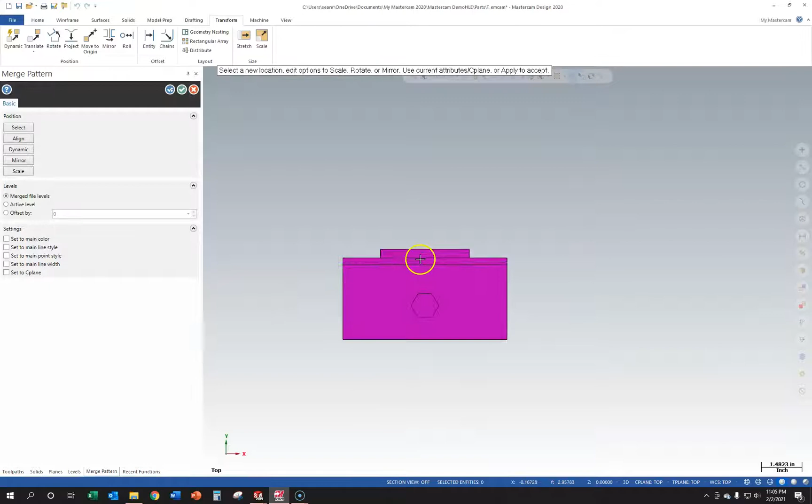So we'll click open. I'm just going to confirm that all the parts are here. I'm not going to make my rotary moves yet. I'm just going to click OK on this. Everything looks pretty good. When we go into levels, I'm going to cycle through my visibilities to see which parts are which and rename everything. So I'll start with 6. Appears to be a parallel.

1.563 parallel. Probably means number 5 is the same. Yeah. 1.563 parallel. Number 4 is our stock block. Again, I'm putting op 10 in front of these so that if we had additional operations later on, we'd have different solids, we'd want to make sure we have that in front so we know the difference between the two.

Number 3 appears to be the part itself. Yeah, so I'm just going to call that op 10 solid part for now. Number 2 is the movable jaw. Which means our number 1 must be our fixed base. Say vice base, something like that. Perfect.

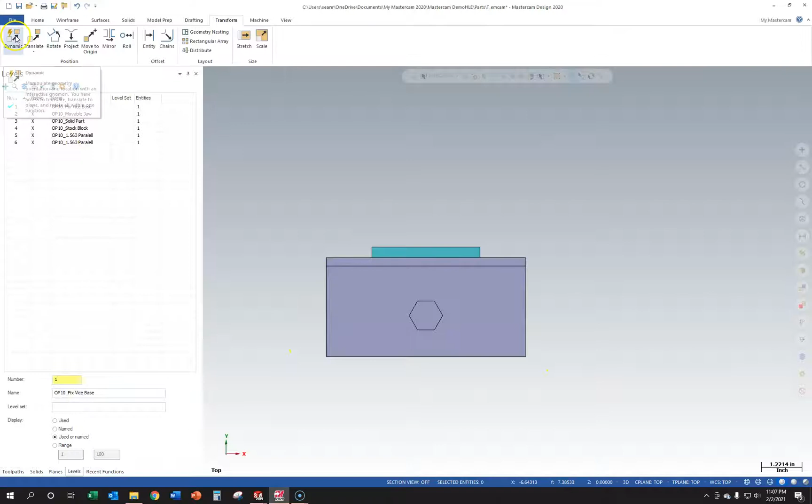Okay, with all of those changed, now we can look at positioning the assembly in the proper orientation. So if I right click and look at top, you'll see that per usual the assembly is out of whack by 90 degrees. So we're seeing the front of the assembly right here. I'm going to go to dynamic. I'm going to rotate in space so I can kind of see the isometric view, and I'm going to click anywhere for the gnomon to start. I'm sorry, we need to select all the pieces first. So I'm going to do a pick box and the selection, and then here's my gnomon.

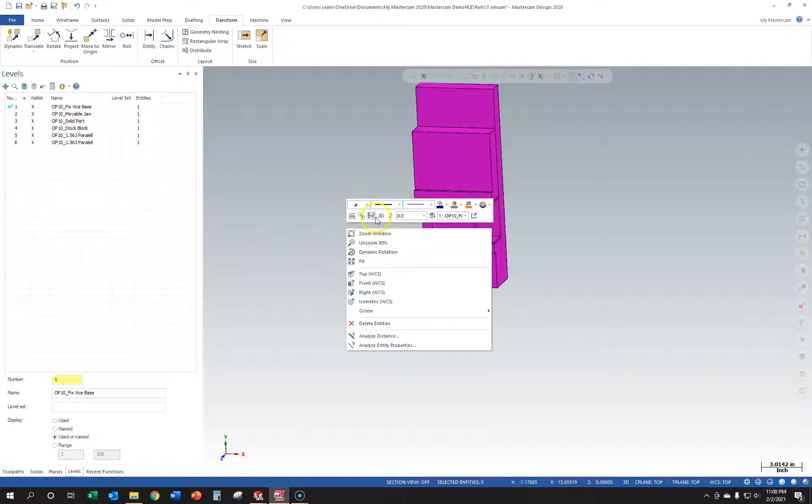So again, we want to rotate 90 degrees like this in this direction. That's between the Y and the Z axis. I'll left click on that segment, and it looks like we want a positive 90 degree move. So we'll type in 90, hit enter, check the preview, looks good. I'll hit enter again, and then OK. Again, you'll see that we need to clear colors to get the purple selection color to be removed. And now when I right click and go to top, you'll see that we now are looking at the top view correctly.

Now, in order to get the WCS point where we want it, we're going to turn the stock off for a second and take a look at the part. So we do not have a sharp corner to use currently on this part in order to get the bottom left hand corner. And looking at the part, I'm not sure if what we want to do is use the bottom left hand corner. I'm going to open the blueprint up again and kind of show you what we can look at as far as datums here.

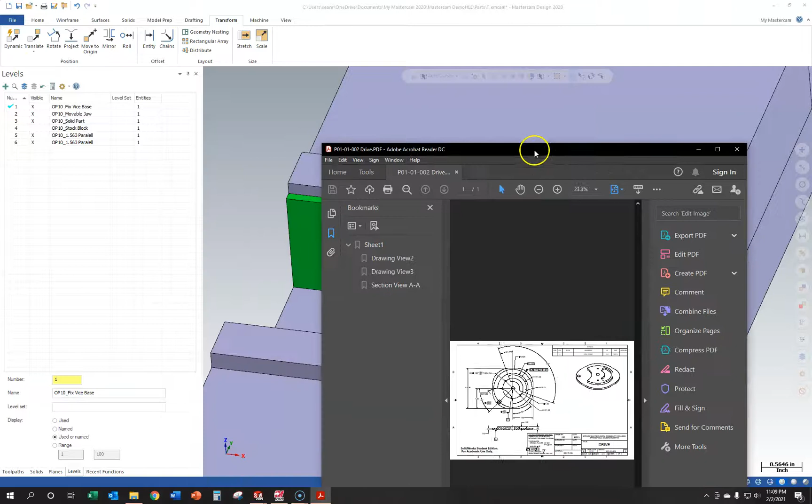So you'll notice that most of the dimensions come off of the center of the part. That is one of the most important positions, and that's because all of these are based off of the pin in the middle. So in order to make sure all of these are correctly machined, when we read the program, we want to base everything off the middle.

So what I think we'll do is we'll just use the top of the part here, this hole, as our 0, 0 point, and we'll go from there. That'll be the easiest thing for us to do. So what we'd have to do on the machine is we would actually be touching off on the edges and then offsetting a certain amount, this 1.5 inches specifically, in order to get to this position and zero this out.

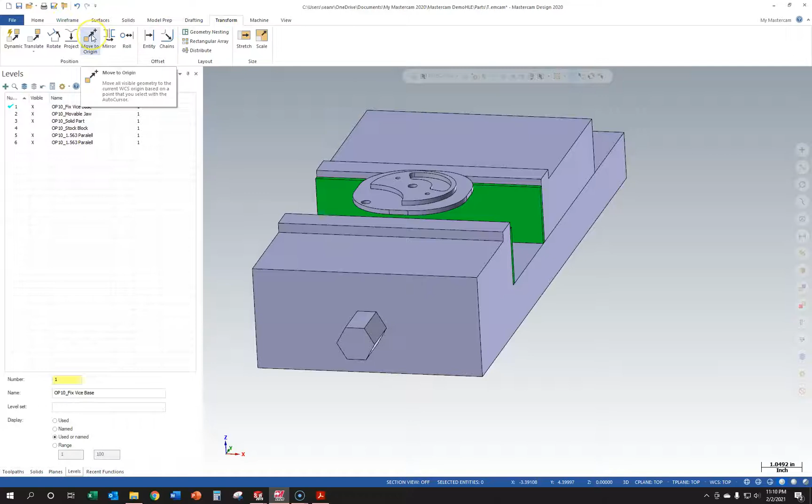We're going to move this to the origin. That's one of the easiest ways to do it. It's really quick, and then we'll actually be ready to go for the most part. We'll have to make a new plane afterwards. So if we go up into Transform, we have a button here called Move to Origin. I'm going to turn on the F9 key just so I can see where the origin is, just to confirm that it actually goes where we want it. And I'm going to click on Move to Origin.

You'll see that it selects everything on the screen, and actually I almost made a mistake here because I turned the stock off. We want to make sure the stock is turned on before we push that button. So we're going to confirm that all of our levels are on. I'm going to click Move to Origin. I'm going to select the point to translate from, and that's basically the center point of the part. Now that I have this all selected, I can turn the stock back off, and I can click on the top of the part in the center of the circle here and make sure we get the center point.

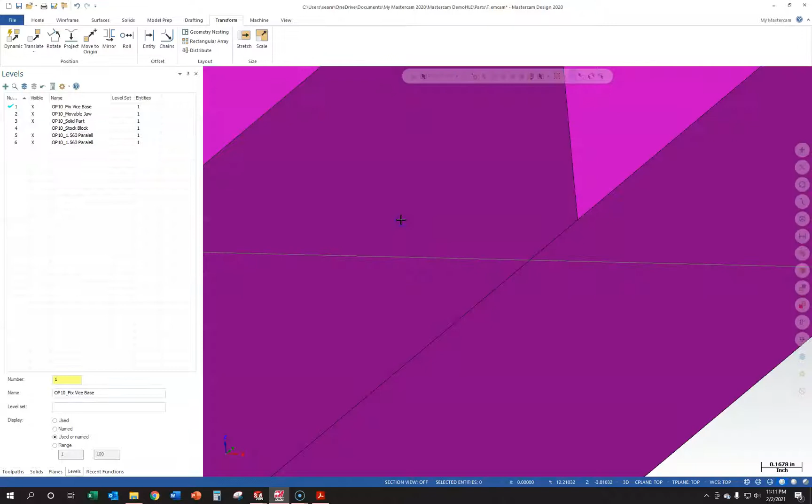And then we can confirm that that is indeed where we are, and when I turn the stock block on, it also came to that position as well. So that is exactly good. I'm going to hit F9 and turn that off. We're going to right click and then clear colors.

So now that we have that, I'm going to go ahead and just make a copy of the top plane. The position is going to be exactly right, so all we need to do is literally duplicate this and rename it. So we'll duplicate it, rename, we'll call this op 10 G54, and then we're going to make that our active plane, so that when we start using it, it'll be on G54 here. And now we are able to go ahead and just create our stock real quick.

In order to do that, we need to bring in a machine group. So since I'm working at home and I don't have the stick profiles loaded, I'm just going to use the default. I'm going to check the list anyways. Yeah, so we're in here. If we had the stick posts and everything loaded, we'd have more stuff here that we could add. But for now, I'm just going to click on default. Going to go to properties, stock setup.

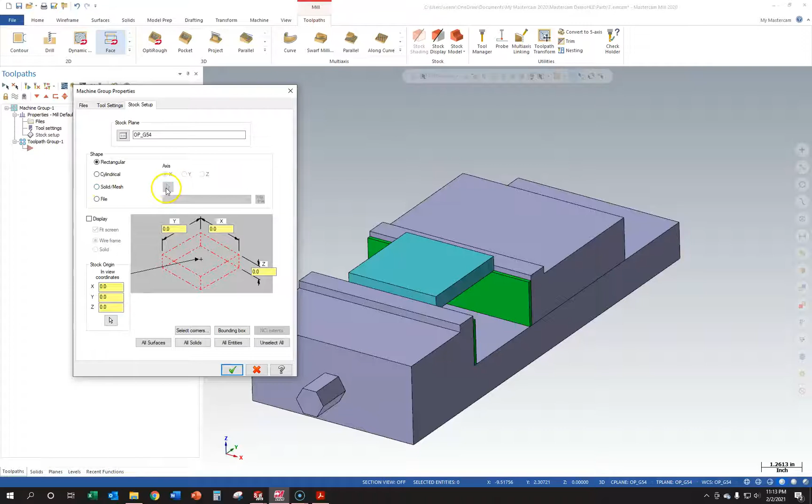Going to do something a little bit different this time. So instead of doing the solid mesh selection, I'm going to use a bounding box. And this allows us to click on the solid. It's going to bring in our size settings and everything like that. Just going to click on that, and then I'm going to click end selection. You'll see that it made a stock profile around the outside of it.

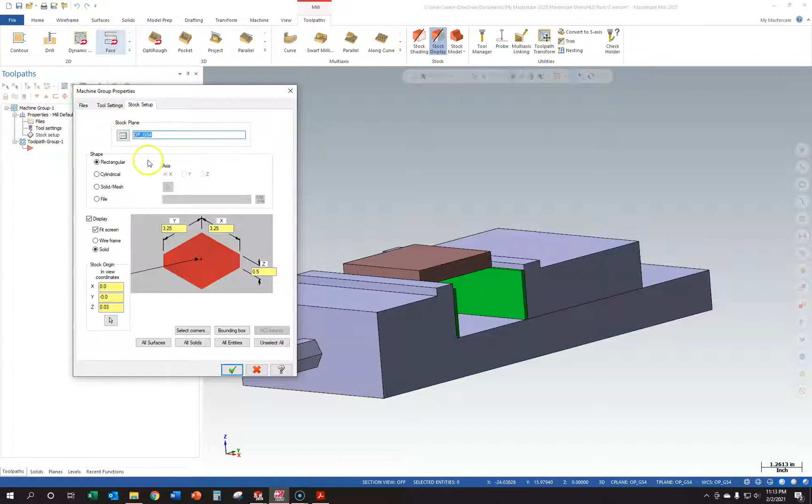Do we want it to be a solid stock? Yeah, it turns into a solid stock after that. The only thing you need to change here is if you want to do this solid or wireframe. I usually like to work with the solid. That works out for me. Make sure my op 10 G54 stock plane is active, and it actually looks like I misnamed this. So I'm going to go back in there and change that real quick. Yeah, I forgot to actually put the op 10 part in there. Op 10 underscore G54, that's what we want.

Okay, perfect. So now I'm going to go ahead and just get rid of the solid body for now, just so I can see what it all looks like. And I'm happy with that. I just want to review the front here and see if we have stock on top, which we do. Plenty of clearance in the bottom. I'm going to right click isometric. So I'm happy with this.

Our levels are all set up. Stock is all set up, and our WCS is in the correct orientation in relation to the part and to what the important dimensions are. So yeah, not too bad. At this point, we are ready to start machining this part. I'm going to go ahead and save this before we get going on that.

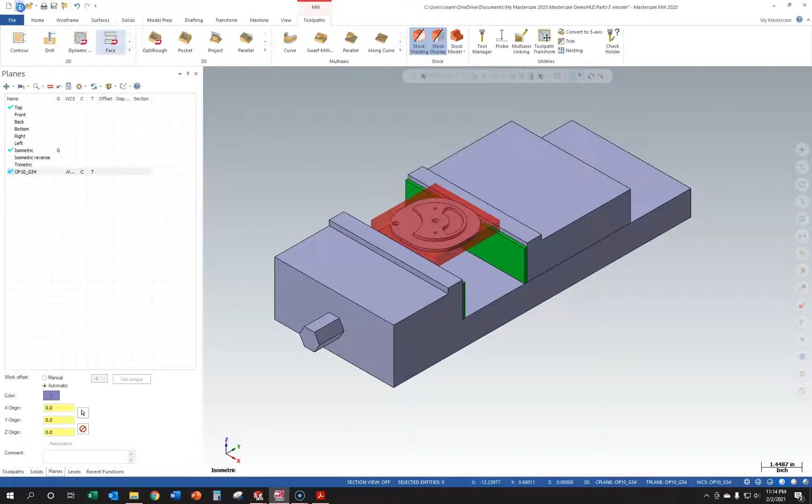And again, I'm going to go find my working directory, and we'll drop this in here. So for me, it's inside my week 2 folder, and I will call this op 10. Actually, we'll go Geneva mechanism drive op 10. Save. Okay.

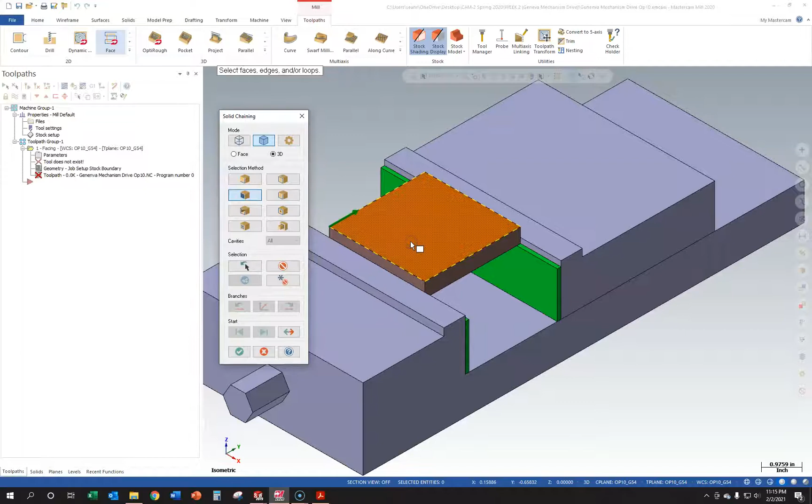So the first thing we're going to want to do is face the part. We're going to turn the solid block back on because we're going to use that as our chaining entity. We'll turn it back off again afterwards. So we'll go to face. I'm going to make sure face is selected. I can uncheck loop too if I want to. Just click on face. Click on the top of the part. Click OK. And now we're inside of our 2D toolpath facing box here.

One chain selected. For a tool, I'm going to go ahead and find my 2.5-inch face mill. You may have to use the filter to find it, depending on what library you're looking at. And you don't need to use 2.5. If you want to use 2 or 3, you can use any combination of that. Just use a realistic tool. Don't use one of these obnoxious ones down the bottom here.

The comment for this face mill is going to be the usual. So face off, I think we said 30 thousandths of stock to establish Z 0.0. Something like that sounds good. Feed rates and all that stuff we're going to leave the same at Mastercam's default. Cut parameters we'll leave the same too. The default overlaps and stuff are fine.

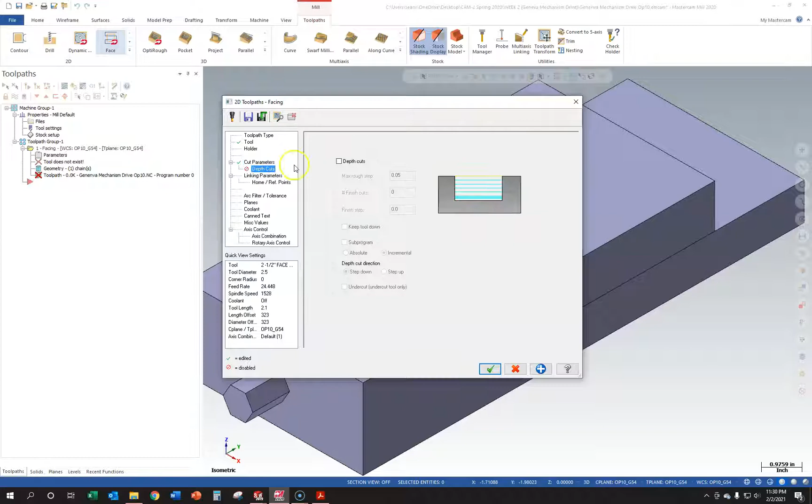We don't want to leave any stock on the floor, so I'm going to go ahead and change that to 0. We can mess with some of this stuff later on if we want to try and make it more efficient, but for now we're good. No depth cuts. We'll cut it all in one pass. Linking parameters, we're used to these by now, so clearance of 2, retract absolute 1/4, feed plane absolute 1/4 inch.

Top of stock should be 30 thousandths. That makes sense because that's how much extra we have on the top. And then our depth should be absolute 0. I like to double check this by clicking. I will have to turn off the solid stock to do that. So if I click on the top of the part anywhere on these snap points, that should be 0. So that confirms that we're on the right plane.

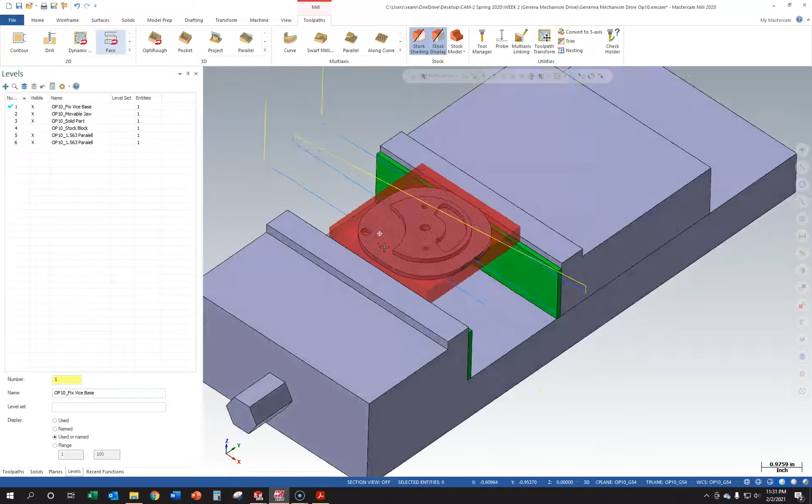Everything looks good. And I'll go ahead and turn the coolant on. We'll flood it. Apply and OK. Looks good to me. We'll run a back plot on that. Don't really have any comments. It all looks good. Although I do have it one way. There's no real reason to do that. We could change it to dynamic or something along those lines. Nah, that's not what we're supposed to do. Just double check something here.

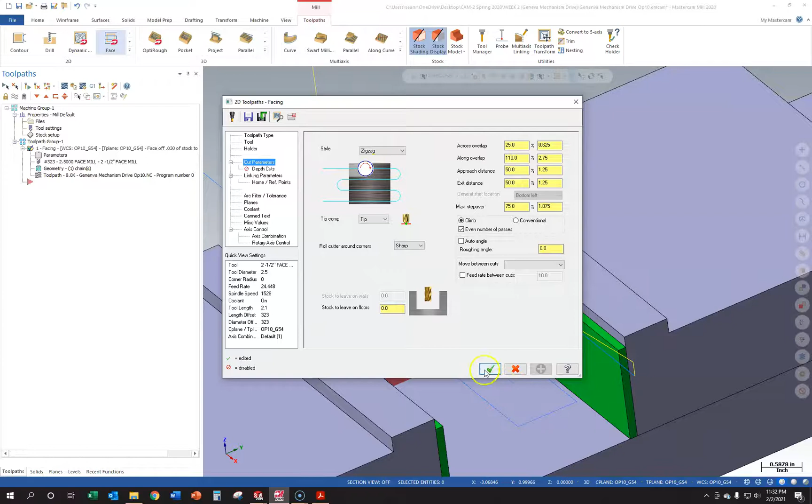Zigzag. So if you do one way, you'll see that there's some lifting. It basically only cuts one direction and it lifts up and goes back. Zigzag, you stay on the part the whole time and you're not lifting up off the part. So this tends to be a little bit faster. So I'll put that back on zigzag. There we go.

The next step that I want to perform is going to be the machining of this area here, which is going to involve using a dynamic milling pass, and we're going to use the stock profile as the outside machining boundary, and then we'll use this perimeter on the inside here as the avoidance, so it machines between the end of the stock block and this here. To do that, we're going to use dynamic. And again, we need a machining region to be our stock block. That's what we want to be contained.

So I'm going to turn on the solid block again. I'm going to go to machining regions, and I'm going to use the loop selection method for solids, and that will allow me to select the outside of the stock block. It correctly identified the face that I want the first time, so we'll click OK. Direction here in this case doesn't matter. We want to be able to start from the outside, right? We want to be able to machine from outside where we started. If we did this, we wouldn't get these corners machined properly. So we want to stay from outside.

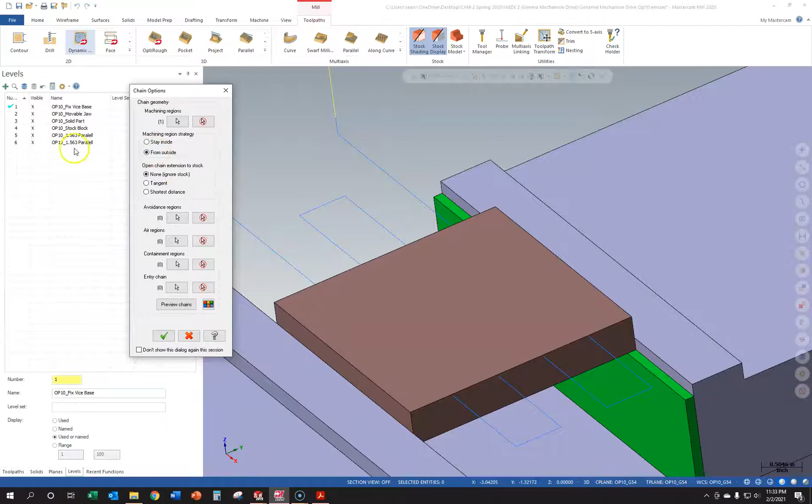I'm going to turn the stock block off again so I can see the part. And now I'm going to turn our avoidance region on, and I'm going to select the same thing. We'll do a loop, get rid of the face, we'll do a loop again, and I'm going to select the bottom part of this geometry. The top would have worked too. I don't think it matters one way or the other. So basically we're telling it that we don't want to machine in this area, and we're going to machine up to the machining region section there.

So those are our two chains. We're going to click OK, and we'll stick with dynamic mill. Again, our chain geometry has been selected. For our tool, we have no inside radii or anything to worry about. Nothing's going to constrain the size of the tool that we use.

So I'm going to go ahead and find a 1/2 inch or 3/4 end mill and go ahead and use that. I'm going to go use my filter. I'm going to turn on just the flat end mill filter, and we'll look. I'll use a 3/4 flat because that will rip off a lot of material nicely. So we're going to say, let's see, rough machine.

We'll call that area the boss. We're going to leave stock on the walls and the floors for finish. So let's just say, let's leave 10 thousandths. Leave 10 on the wall and 10 on the floor for finish. And we'll do those two passes separately coming forward next time here.

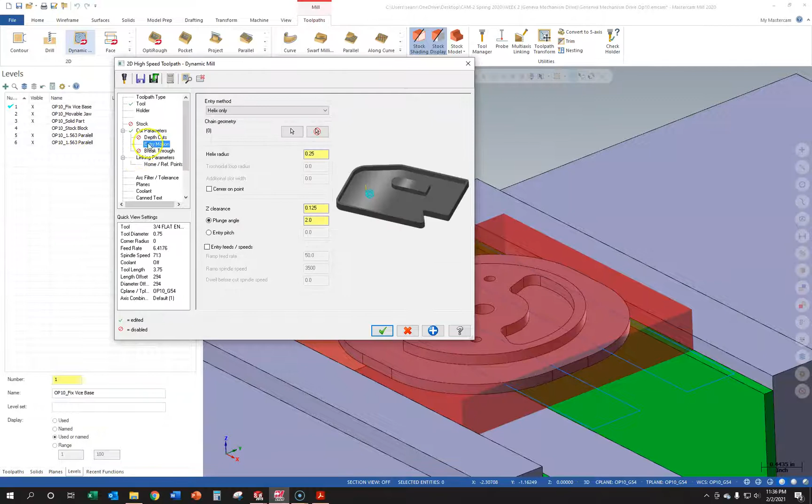Entry motion we'll leave alone. We'll look and see what it looks like on the part when we do this. There's no breakthrough. Linking parameters, same numbers we always use. Clearance of 2, absolute. Feed plane should be absolute 25 for now. Our top of stock is no longer 30 because we've removed that with the facing operation. So top of stock is now 0, and our depth should be absolute.

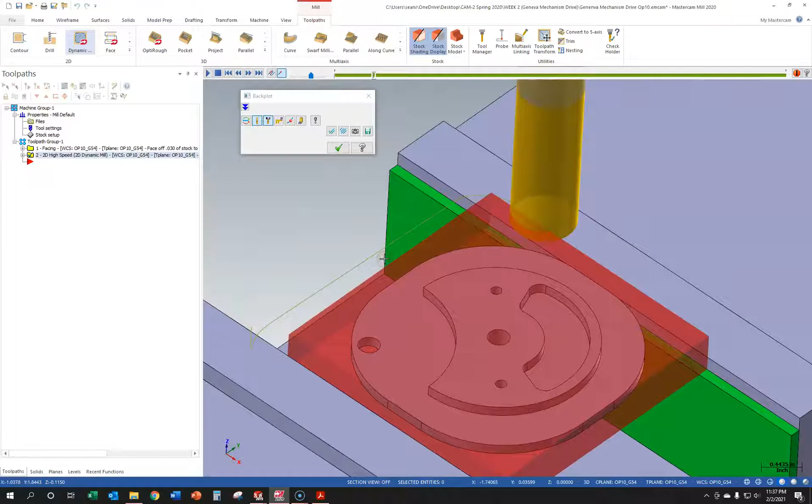And to get that value, I'm going to click on depth and then select the bottom of that boss. So negative 0.125. Again, I'm going to go to coolant and turn the flood on, and then I'm going to click OK and see what we get for a machining profile. Looks okay from here. Let's go ahead and check this tool path here. It's a large end mill, so it's going to rip most of this material off pretty quickly.

I'm going to check my front view and make sure that it makes sense that we're 10 thousandths off the bottom of that. Looks good. And then we should also be 10 thousandths away from the wall too when we get down to that last pass. I'm fairly confident that we're good here. Perfect. Okay, so now we need to do the finish passes on the walls and floors here.

We could do that now, or we could save ourselves a tool. If we're going to use the 3/4 end mill for the outside of the part as well, we may want to do that first and then switch to whatever finishing end mill we're going to use, and then go from there using that tool without having to go back and do a tool change. So let's do the roughing on the outside first, and then we'll come back and do the finish passes for these two features. We're going to use the same dynamic mill.

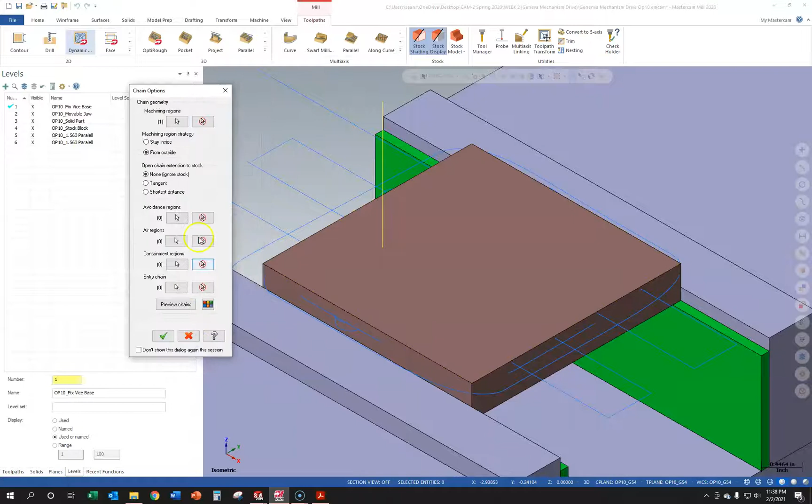This time our machining region is going to be the stock block again, because we're going to be machining out to here, but just a little bit lower this time. So our machining region will be the stock block. To turn that solid on again, we'll use loop for a selection method. That looks good. We're going to do from outside again. We'll turn the stock block off.

And now this time our avoidance region is going to be the very outermost part of the stock. So I can still do a loop. I'll click on the bottom of the part. Goes all the way around. We'll click OK. And now we're basically going to walk through this and do the same parameters as we did for this roughing surface here. So we'll click OK here. We'll go through it again real quick.

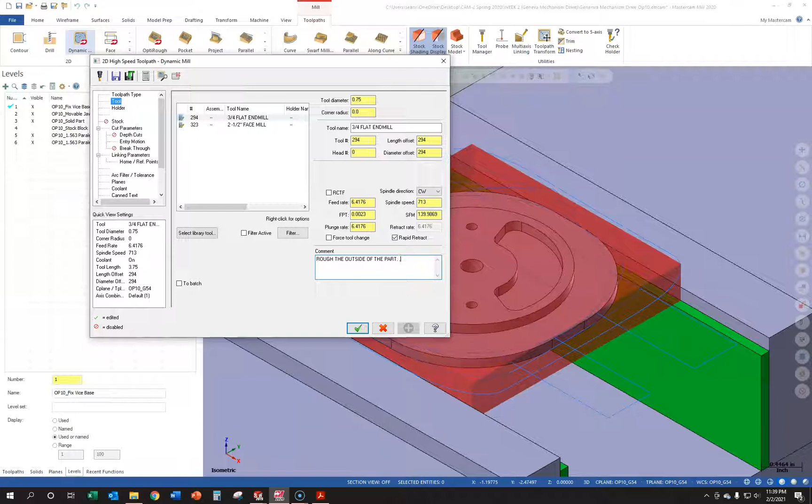So for a tool, we'll use that 3/4 mill again for roughing. We'll say rough the outside of the part. In this case, there is no floor to these pads, so we don't need to leave anything on the floor, but we will leave 10 thousandths on the wall for finish again. And then we'll finish the floor at depth. Holder we can skip. Cut parameters again. I'm okay with the defaults, no big deal there. We're just going to change this to 0 on the floor.

No depth cuts because we're using a large end mill. Entry motion looked fine in the last one, so we're good there. Linking parameters all look good. The first 3 look good. Top of stock again should be 0. And this time our depth is going to be the bottom of the part here. So again, these lines will work. So in this case it's -0.25. We could go a little bit below that. We're going to flip this over and face the bottom of it afterwards.

We could use breakthrough for that. Well, we don't want to do more. We could actually use breakthrough by a little bit and add an extra, let's say, 10 thousandths here. That way, it just cleans down below where the part's actually going to finish.

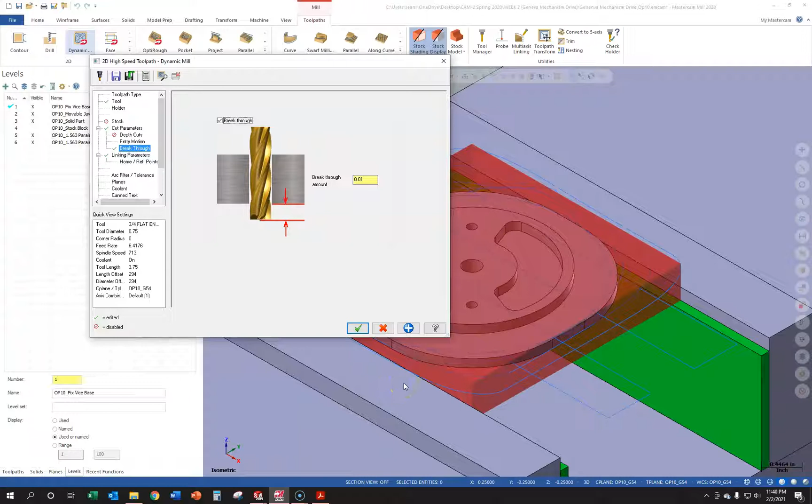We don't want to go too deep because then we'll interfere with the chuck here. But we'll go a little bit farther than the full part depth, and we'll turn coolant on again. Apply, OK. And then we'll preview this toolpath too. This one we're going to want to watch where we are on the vise. And this is where it pays to have the fixturing because we can make sure we're not interfering with anything as we're machining this.

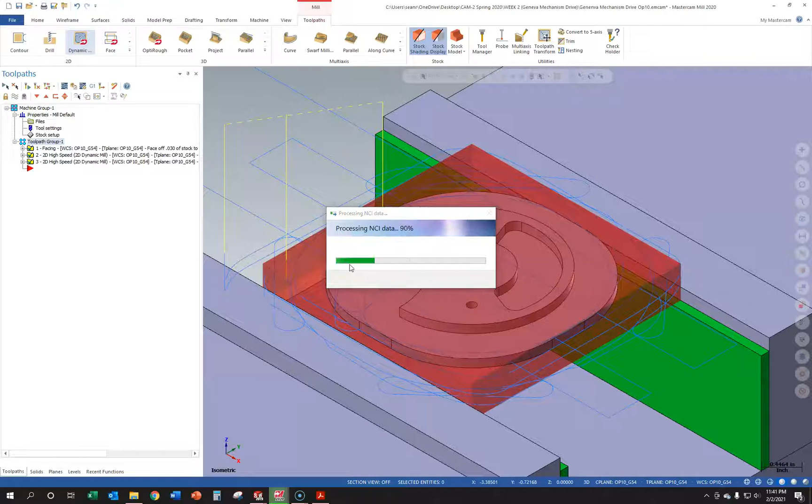But otherwise this all looks pretty good. Look at the front view again. So see, we still have plenty of clearance here. We're still cutting a little bit low on the bottom. That's good. So we can also go ahead and check our solid verify just for fun to see what it looks like. I'm going to go ahead and color loop it, and we'll hit play and just take a look. Good. So we're getting there.

Close that. I'm going to go ahead and save it. Oops, I did save as instead. Now we'll go ahead and do our finish passes. We're going to copy and paste the last couple of toolpaths that we made just to make it a little bit quicker. So if we're going to do a finish pass using number 3, we can just highlight number 3, right click, copy, right click, paste. So number 4 is a copy of that. I'm going to go into number 4 and go to parameters because our chains are all good. That's the whole reason why we copied.

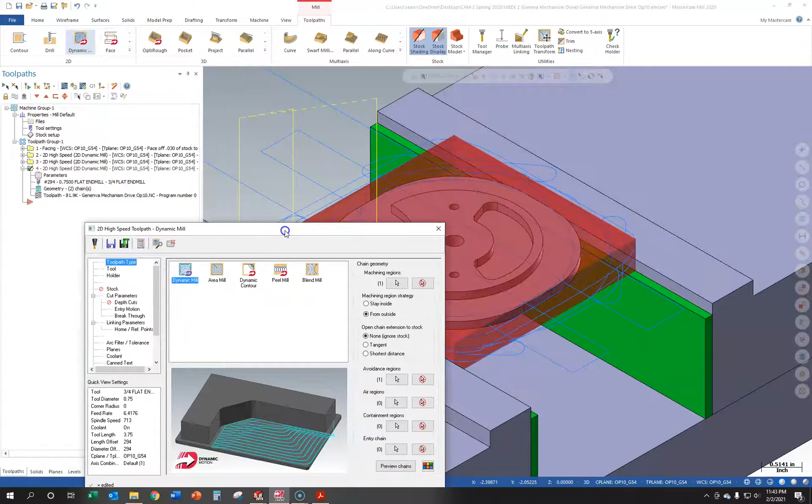Now we decide what we're going to have for a finish pass here. Actually, we probably shouldn't have done a copy. We could do dynamic contour, but this really could just be a contour because we don't really care about what's happening out in this area. This is just junk. The only thing we're finishing is the wall. I may just go back and change that. We'll copy the next one, but for this one let's delete number 4, and I'm just going to do a basic contour instead.

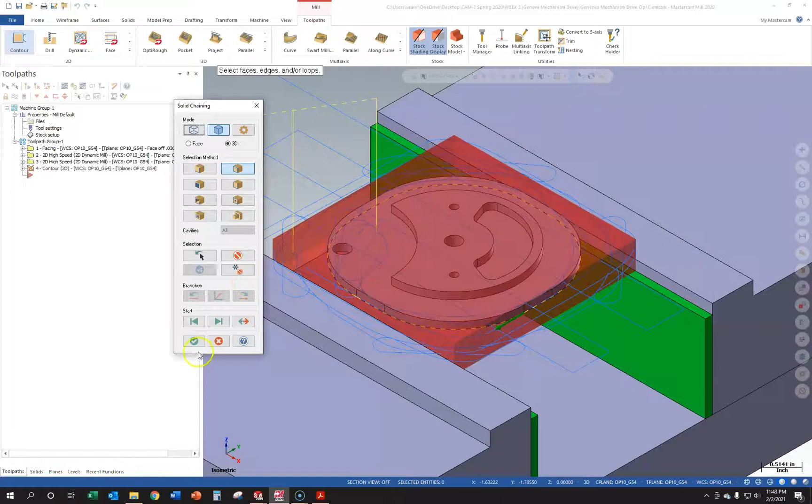So we'll do contour. I'm going to use loop again and grab the bottom of that part. That's correct. We'll click OK. And now we decide what we want for a finish end mill. We'll go into tool and for the comment we'll say finish the outside perimeter. For a finishing end mill, we'll just emulate using a smaller, finer end mill. I'll use the same filters.

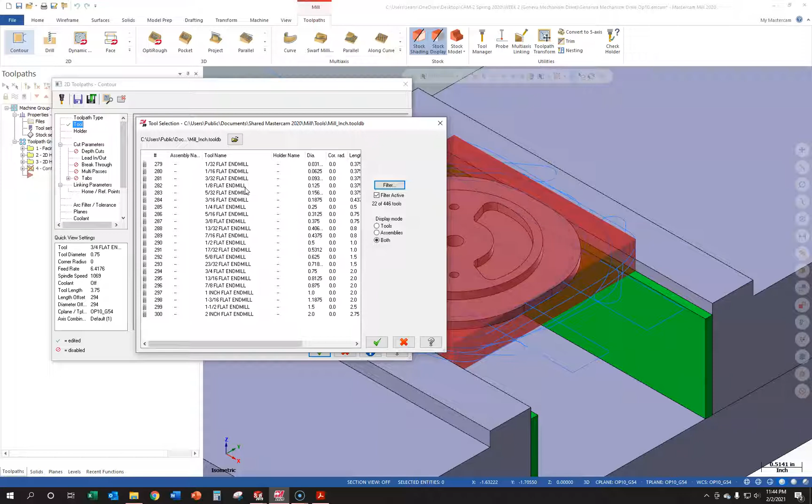Depending on what library you're in, you'd see some end mills called out as finish and some as roughing. The only difference is generally the number of flutes. Finish end mills tend to have fewer flutes, so you might see a 2-flute finish end mill versus a 4-flute rougher. Here I'm going to pick a 1/2 inch flat, and we'll call that our finishing end mill. Reinitialize speeds and feeds just to make sure. That looks good.

So cut parameters here. Computer comp is fine. Compensation we'll have to look at and see which side we're on. I think left is correct. No stock to leave on floors and walls, which is good. 2D contour type is good. No depth cuts; we're going to do it all at once. Lead in and lead out we'll leave as default. No breakthrough. And now we'll do linking parameters.

We turn the clearance on. Everything goes to absolute. Retract and feed plane are 1/4 inch again. Top of stock is now 0. And our depth is going to be an absolute value, and it should be 1/4 inch. We'll just double check that. Perfect. Again, make sure coolant gets turned on. Apply and OK. And then we'll backplot that toolpath and make sure we're happy. Looks good.

Now we can go ahead and do a copy paste. Now that that contour is done, we have 2 finishing passes on this top surface: the wall and the floor. I'm going to take toolpath number 2 because that was the first dynamic toolpath we used, copy that, and paste it underneath number 4, so that becomes number 5. This time all we need to do is go into the parameters and change this to the 1/2 inch flat end mill. In the comment we will say finish machine the floor.

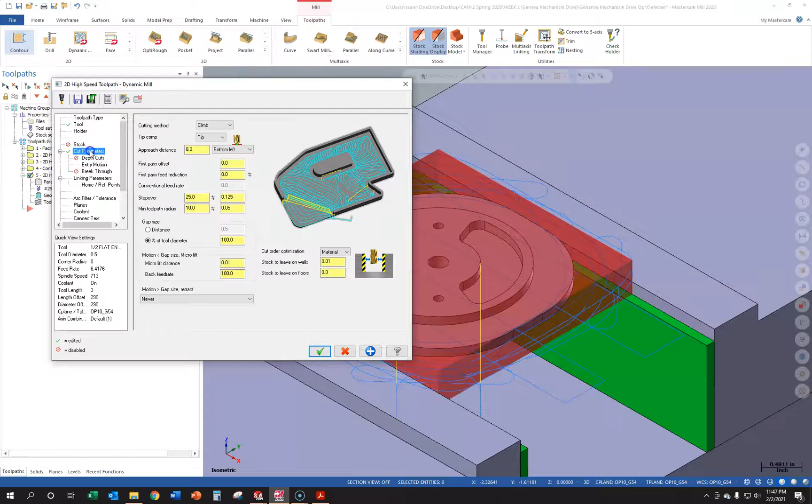Leave 10 on the wall. We're going to do the 10 thousandths afterwards. Inside of cut parameters, we'll go ahead and change the floor to 0. Everything else should stay the same. No depth cuts. We'll click OK, apply and OK.

We have to regenerate the toolpath since we just modified an existing one. We'll backplot that, so we should see that this is going to machine the floor. You'll notice that we cut air for the first pass, so we may want to change the machining region so that it is this area here instead of the stock block, since all of this material is already gone.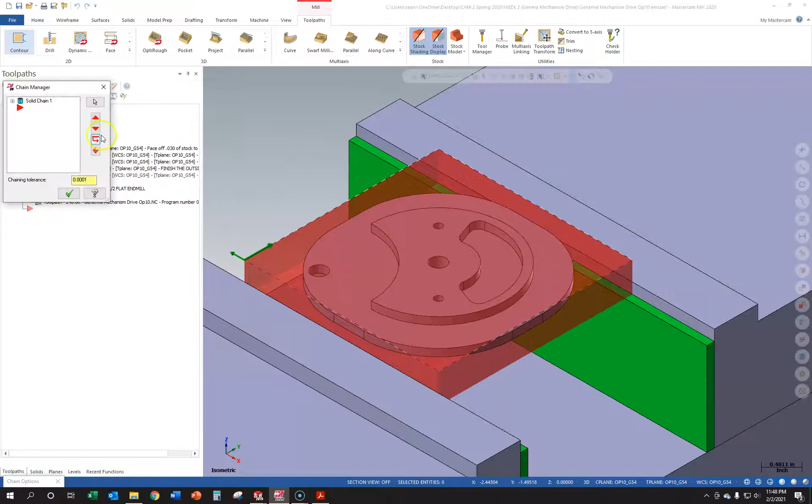I think that's probably a good idea, so we'll go back in there and do that, and we'll save ourselves some time. We'll go into chains and change our machining region. We'll right click on solid chain and hit rechain single. We'll use loop again, but instead of using the stock block, we'll use the outside of the part since all our material is already gone. We'll hit apply and OK.

OK, regenerate that, and this time we should be on the part right away. See that? We're not cutting air for the first pass. That looks good. I like that path a lot, so that looks great.

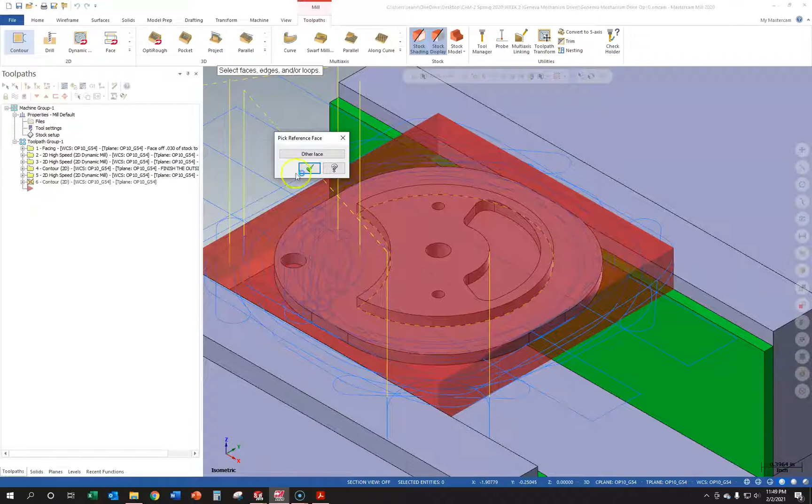Okay, now we're ready to contour, so no more copy pasting. Again, I'm just going to use the contour command. Make sure the red insert flag is down at the bottom. We'll hit contour, we're going to use loop, and select the surface we're going to finish for the wall - that's going to be this chain again here. And click OK.

Inside of contour, we're going to use that same 1/2 inch flat end mill. This time the comment will be finish the wall, finish the boss, finish the walls on the boss - something like that sounds good. We're not calling out our final Z-value, but again, I'm not really a stickler as to what we put in the comments here for starters. We could come back and add more detail later if we needed to.

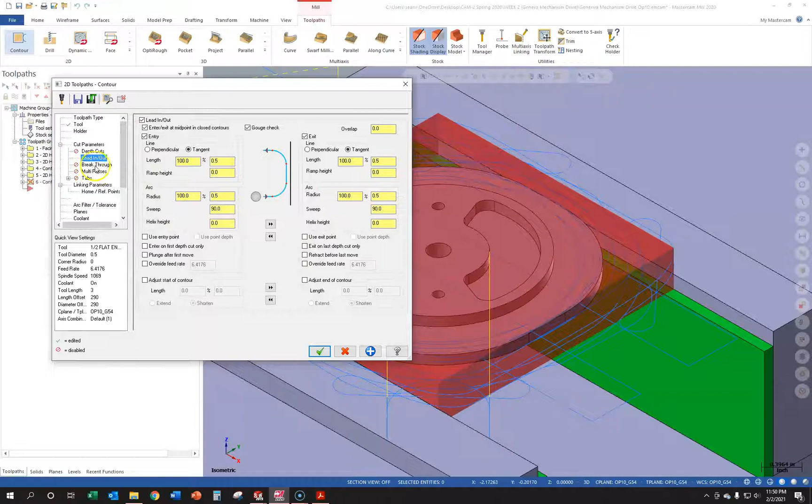So our cut parameters here, just making sure we don't have any stock to leave on the walls or floors because we're finishing - this is good. No depth cuts, lead in - again, I'm happy with that. We can be more specific, but there's nothing wrong with what we have now. All the way down to linking parameters - again, all of these values should be the same. And then I want to make sure my coolant is turned on.

So we'll hit apply and OK, and we will go ahead and backplot that. So as you can see, we're on the wrong side of the chain - we're cutting on the inside instead of the outside.

So I'm going to go into geometry, confirm that, and we can go ahead and right click on the chain and hit change side. That changes the little arrow to be pointing out, and that should change the side of the end mill that we're machining on, or the side of the chain that we're machining on. There we go.

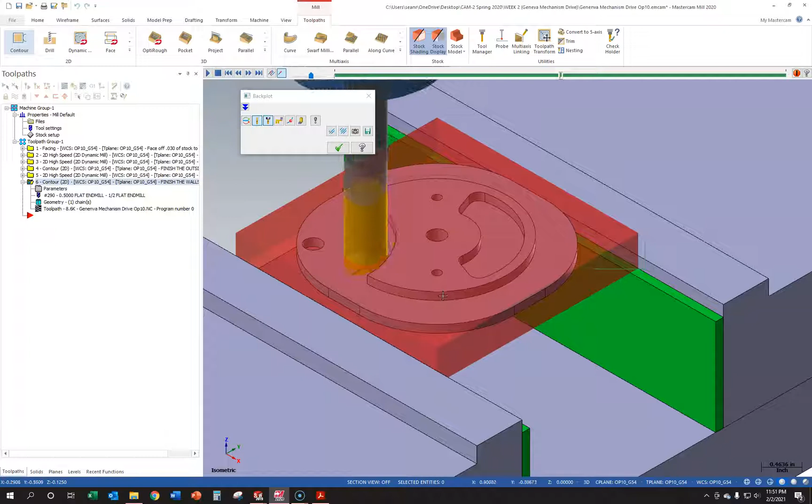That looks good. I'm going to go ahead and click Save. And that is all the tool paths for the outer areas.

And now we need to focus on this inner pocket and the drilling. So this feature has some constraints because we have some radiuses that we need to make sure our tool will fit into when we're finishing.

So I'm going to review the print real quick, and we'll see that the radii inside of the pocket are 0.13. That means our largest size end mill to perform that machining operation would be 1/4 inch. Realistically, you want to go a little bit smaller than that because you don't want to just throw the size of the end mill in on the radius. You want to go a little bit smaller so that it actually machines the pocket and doesn't just nestle in and then pull away.

So later on down the road when we finish this, we'll have to use maybe a 3/16 end mill to finish. But outside of that, we should be able to use a larger end mill to rough this pocket first. We'll use a 3/8 end mill to rough it and see if that looks pretty good. So rather than use pocket, I'm going to use dynamic again, just because that's usually the preferred method I like to do.

We do have a pocket command, but it's not as clean as using dynamic. So I'll go back into dynamic mill. Our machining region this time is going to be the pocket itself, so I'll click on a loop on the bottom. There's not going to be any containment, and we also want to stay inside for this feature. We don't want to move outside because that would scrap the part, right? We want to stay on the inside of these lines. So we'll click OK.

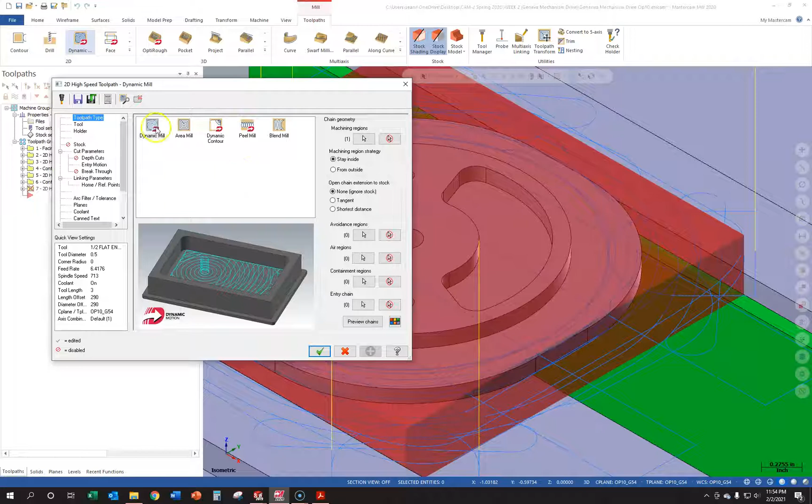We'll check dynamic and see what that looks like first and see if we like the profile that we get. So as I mentioned, for a tool, maybe we'll use a 3/8 to start and see if that looks good, or if we can go even bigger than that. But for now, we'll start with 3/8.

We're going to say rough machine pocket, and we're going to leave 10 thousandths on the floor and walls for finish, just like we did before. So leave 10 thousandths for floor and wall. Leave 10 thousandths on floor and wall, on floors and walls. There we go. Floors and walls, for finish.

And again, we use those independently because we want the cut direction, the cut force to be equal. So we don't want to be cutting on the wall and the floor at the same time. We just get better surface finishes and better tolerances if we do them separately.

So again, 3/8 flat for now. Cut parameters we'll leave alone again, and we'll just make sure that we leave stock on the walls and the floors. So 10 thousandths. We can look at this later.

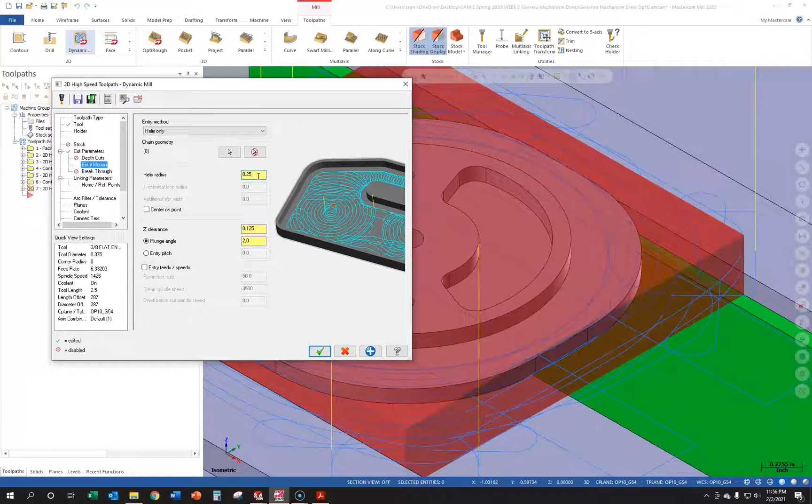Depth cuts we don't want to use. We actually want our entry motion to go all the way down. It'll spiral down to full depth, and then it will start to dynamic out. This radius we may have to reduce a little bit, but we'll check it out and see what it looks like. Again, the smaller this number, the more stress you put on your machine, because it's making little tiny moves to get in here. So the larger you can leave this, the better off you are for the machine. And then the plunge angle is actually how aggressive it's cutting into the material at first. So again, I want to see what it looks like before we start messing with that.

Linking parameters, these values all look good. Our top of stock should be 0 again. Our depth we're going to check out and make sure we have the right depth. So negative 1/8 is correct. We'll turn the coolant on, and then I just want to go ahead and backplot this and see what we get.

Okay, so 3/8 is probably way too big. We'll have to go a little bit smaller. I do like the motion that the tool was making though. Looks pretty clean. I don't know, maybe we'll leave that there. I think that's actually not that bad. I wouldn't want to go any bigger than this. No, I'd say that's good. I think we're going to leave that actually.

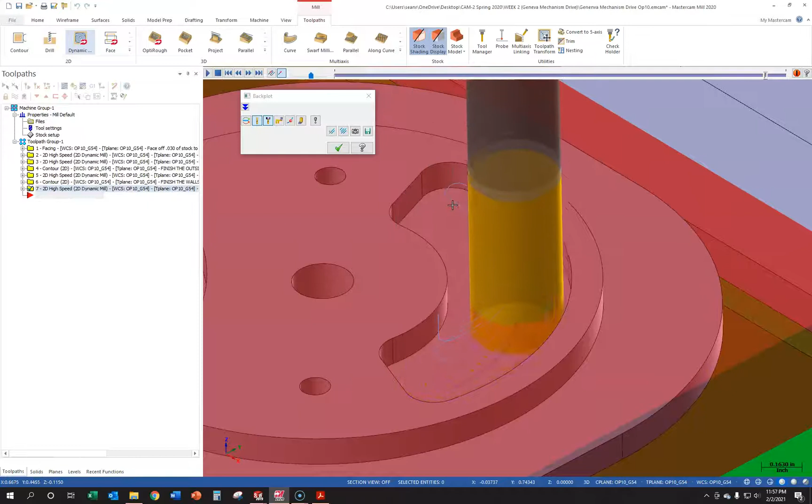Perfect. Just checking to make sure that everything's all lined up. I'm happy with that. At this point, I'm actually going to turn my stock display off because it's really not doing anything for us. We know where it is, and we've already got most of it machined out.

So that's the roughing. Now let's go ahead and finish with our smaller end mills so we can get the walls done. We'll do the floor first, then we'll do the walls. I'm not going to bother copy pasting because it doesn't really add much to this. Well, actually, for the floors, we might as well because it's easy to copy that. So we'll go copy, and then we'll paste.

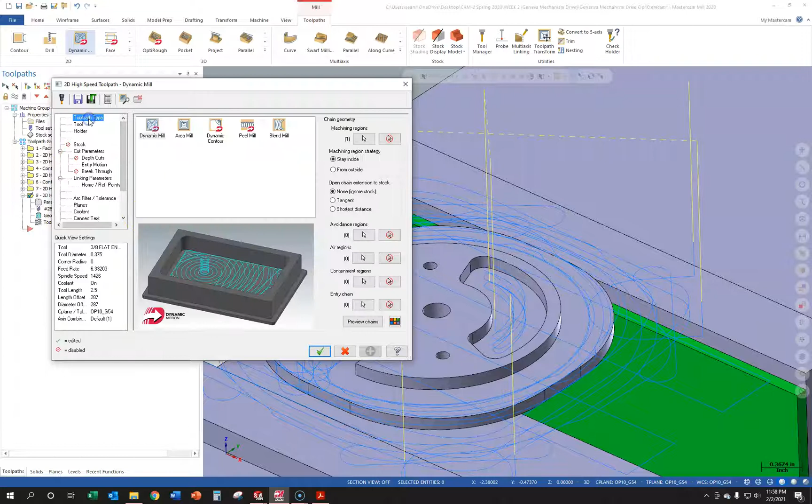Go into number 8, and we'll go into parameters. So there's only two things we should have to change here, right? We're going to use a smaller tool for finishing. I'm going to go and find my 3/16 flat, and we'll use that to finish the floors as well. So we'll use that to finish both the floors and the walls.

I want to reinitialize our speeds and feeds and make sure that gets adjusted properly, so that did get changed. I haven't been very diligent about that. Usually you do want to reinitialize your speeds when you change end mills. Our comment here is going to be finish machine, and then we're still going to leave 10 thousandths, so we'll just say finish machine pocket floor, leave 10 thousandths for wall finishing.

So that's good. Cut parameters is where we want to change that, so we'll change the floors to 0, leave the walls at 10. Double check our linking parameters, and then make sure our coolant's still on. We'll apply OK, regenerate that, and then we'll go ahead and watch.

So we're air cutting right here, right? We can probably adjust that a little bit. We could actually change our feed plane so that we're not cutting that, or the other thing we could do is actually change the way the lead in and lead out looks.

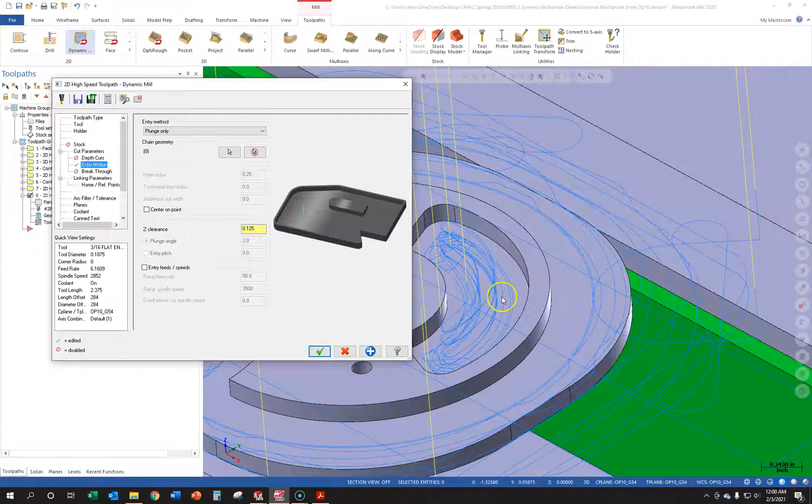Okay, let's think about this for a second. So our entry motion, instead of helix, we can just come straight down. That's one way of saving some of this because we're not entering into material, so all we need to do is come straight down, plunge to our endpoint, and then inside of linking parameters, our feed plane is absolute 1/4.

In this case, we can start getting a little cute, so maybe we change the feed plane to 0. So that would be here. And then it's going to rapid it a little bit lower, and then it's going to feed down at our cutting speed. So see, that cleaned the path up a little bit.

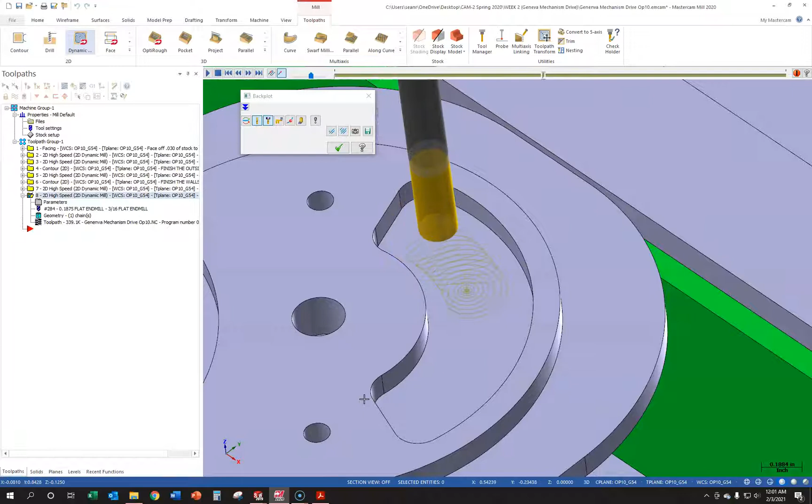So the tool actually starts at 0 here. It's plunging straight down, and now it's finishing the floor. That looks pretty good, I like that actually. That's a lot better, right? That's a big difference. Yeah, I like that a lot.

So since we're only finishing 10 thousandths off the wall, we could actually change this too. So you see this step over here - it's not very aggressive. There's no reason to be that soft with it because we're only taking 10 thousandths.

So now we can go in here and actually start tweaking things. That's inside of cut parameters, and our step over distance is what this is. So 25% of the tool width is only 40 thousandths, so that's barely anything. I'm going to crank this up to 75%, so that's just over 1/8 of an inch, and we can see what that does.

So see, that reduces the amount of motion in the tool and the runtime by quite a bit. And there's nothing wrong with that because again, we're just machining 10 thousandths off the bottom, so we don't need to be that stingy with the cut time. I think that's pretty good, I like that a lot.

Okay, so we'll leave that the way it is, and now we're going to go ahead and finish contour the outside of this pocket. I'm just going to use a regular contour command. We're going to loop that profile again. Getting used to this, going pretty fast.

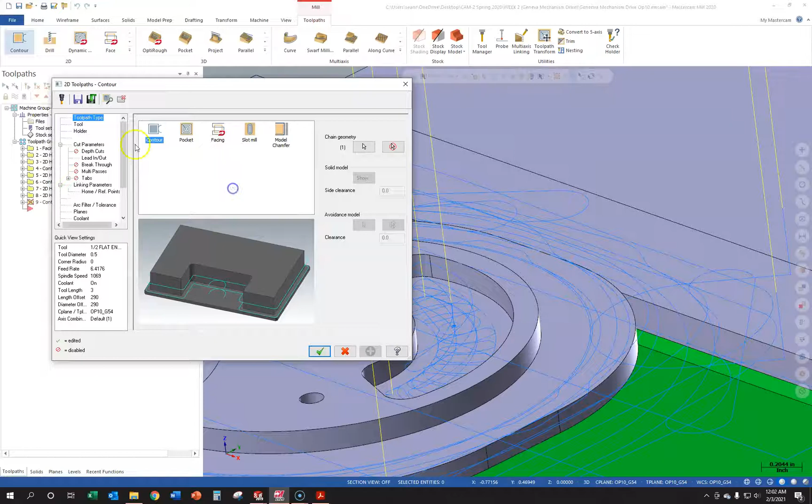So again, we need to use the 3/16 end mill so that we make sure that we are able to machine that full radius without leaving any stock due to the end mill being too small, or too large, I'm sorry. The comment for this will be finish the pocket walls.

3/16 flat end mill again. Cut parameters, just make sure we have 0 and 0 here. We'll have to check and see what side we're cutting on afterwards. No depth cuts, lead in and lead out will be the same. Linking parameters, we'll leave these at 1/4 inch again for now, we'll take a look at it. Top of stock is 0, and we'll just confirm that depth is -1/8, which is good.

Make sure our coolant is on. It is. Apply and OK. And then let's just go ahead and watch what this toolpath does and see if we like it.

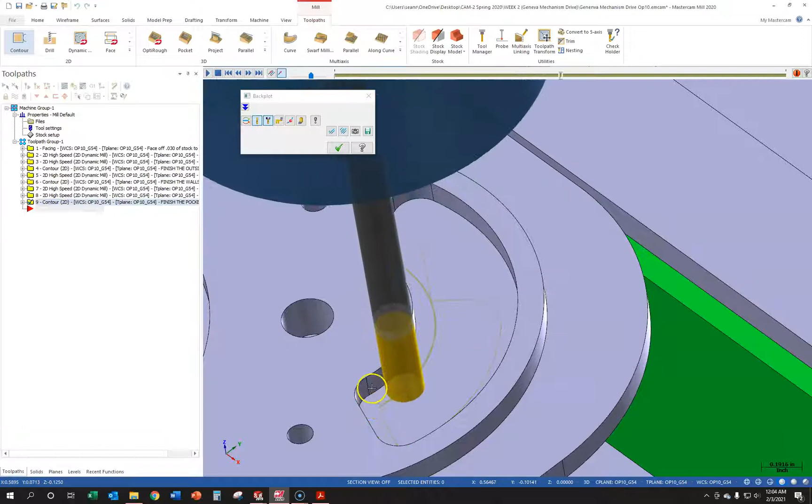Again, we're starting up higher than we need to, so we're starting in the middle of this radius, which is fine. Rolling around there, which is good. Yeah, I'm very happy with this, I don't think we need to change anything on this. Rolls out, pulls up. Perfect.

Okay, excellent. So now at this point we're done with all of our milling operations, and we can move on to the drilling and reaming.

So we're going to start with the spot drills first. I'm going to go ahead and turn the tool paths off so it's just easier to review this. And we are going to check the printout and see what we got.

So we got 2 1/8 inch holes that are +4 -1, which is pushing it for a drill. I'm going to go ahead and drill these for now, but this actually is pretty close to ream tolerances. Normally it's like +7 for a drill, it's not the most accurate tool to use for this. We could also end mill these, or plunge mill these with a center cutting end mill. For what we're doing though, we'll try drilling for now.

We'll do that. These tolerances here, the 253, 251, and this one here, the 5/10, these are definitely going to be reamed holes. This one we may actually even have to mill.

Think about that for a minute. I will probably ream both. We're going to have to make some tools or just change a couple of existing tools to make these sizes, because these obviously are non-standard sizes. So we'll start with the 2 1/8 inch holes though.

Okay, so as I mentioned, these are going to be an 1/8 inch drill. Let's go ahead and go up to our drilling command. And as I said, we're going to spot drill first. So I'm going to select the center points of the 2 1/8 inch holes. If we weren't worried about breaking the edges, I would probably do all 4 at once. But since we are doing it this way, I'm going to do them with just these 2 instead of the 4 holes. Click OK.

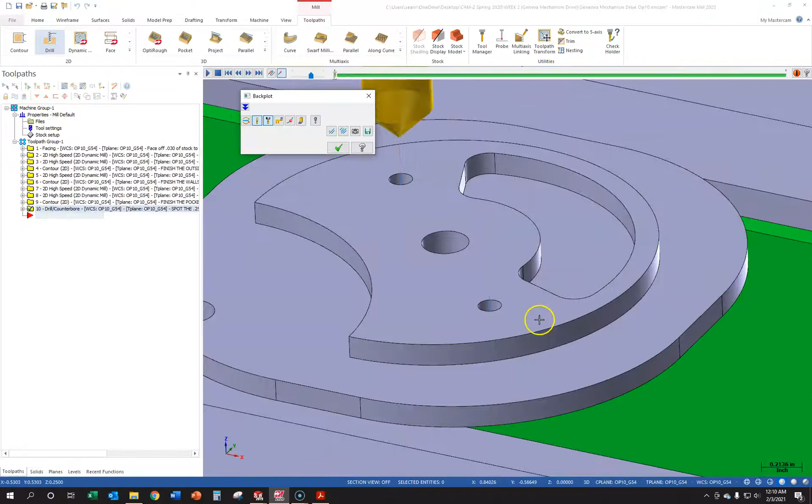So if we want our finished diameter to be 0.26 based on a 90-degree angle, we can see that our depth needs to be -0.13. So we want to overwrite that. That should be our total final depth. And then I'm going to turn our coolant on as well. So we'll go apply, OK, and we'll preview that. What we should see is the spot drill going a little bit deeper than it actually needs to, and that is what we want to see, because we want to break the top of the edge here.

Perfect. Actually, that's a little bit too deep. We're going to change that. Yeah, that's a small hole, so 100 thousandths is definitely way too big. So let's go change our note first. Let's see. Well, 10 thousandths shouldn't have been that much. Let's go 255. So we'll have 5 thousandths breakage on the top of that.

Let's see what that looks like. So we'll go back to depth here. I'm sorry, we'll go with the calculator. So our finish diameter should be 255. That's still gonna be pretty deep. These are small holes, so yeah, that's still too much.

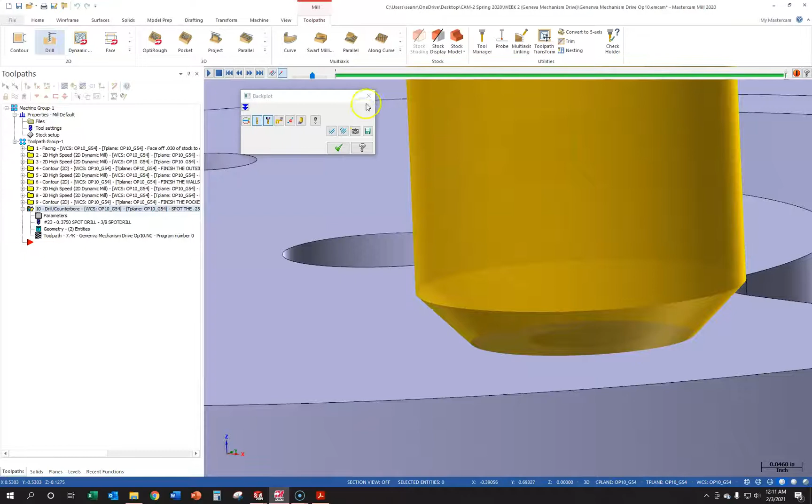You know, I want to check something here. I'm going to go into my SolidWorks model and just confirm the dimensions on this. So if I go to measure these, yeah, they're 1/8 of an inch. Okay. Go back into parameters and the drill, and let's make sure I'm not missing anything here. Cut parameters is good. There's no tip comp on this.

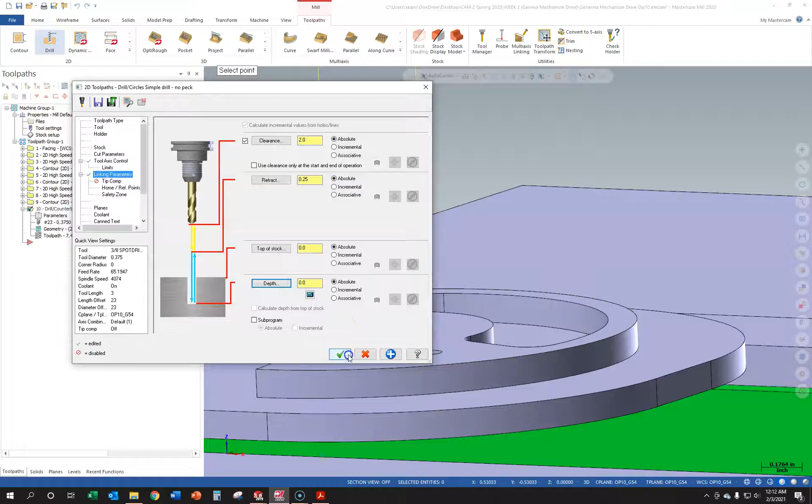Now let's go to depth of 0 and see what it looks like. It shouldn't cut anything at this point. So it's going to stop right on top of the hole. Yeah. Okay. It just looks too deep to me. Let's just do 0.25 for now. Finish diameter 0.25. So depth should be negative 0.125.

And then let's see what that looks like. I think it's still going to be too deep though. If this is correct, then the drill should end up stopping when it gets here. Nope, see, it's going too deep. There's something else going on here.

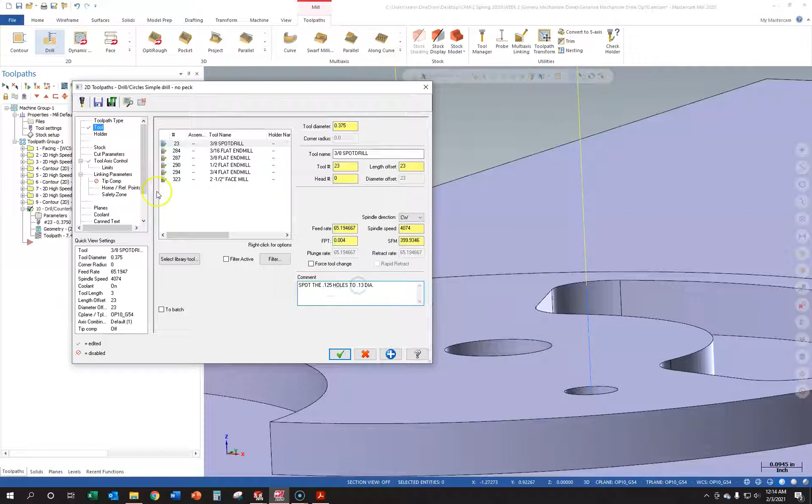So now when we do this, our depth, that makes more sense. So 0.13 is going to be our finished diameter. So our depth should be negative 0.065. That makes more sense. Apply and OK. Now when we run this thing, it's going to look better than that. Okay. There we go. That's perfect.

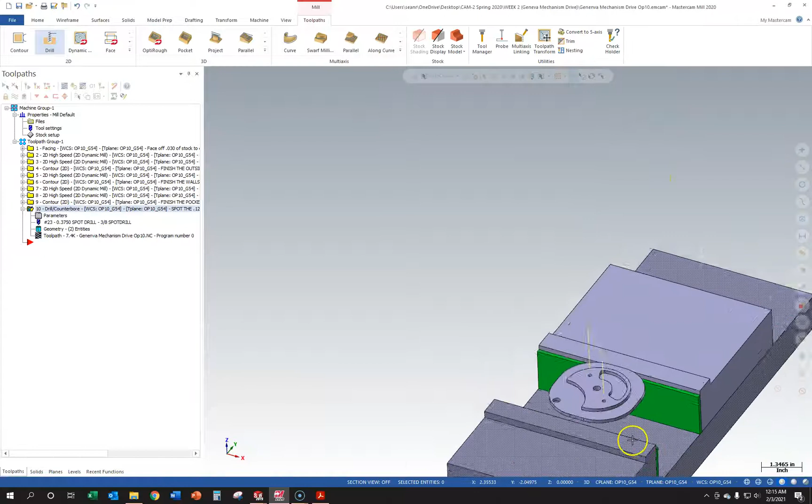Okay, beautiful. Now I just thought of something. So we're going to have different Z depths here. So I probably won't spot drill these in the same command, but we can just copy paste. So let's go ahead and spot these now. We can use the same 3/8 spot. So I'm just going to go to drill. I'm going to go ahead and just do this top one first.

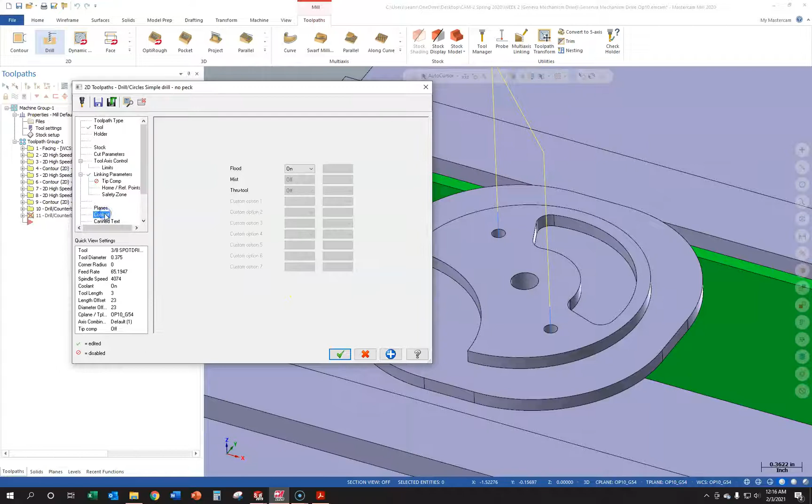Say spot drill center reamed hole to 0.26. So this is actually a 1/4 inch, right? Yeah, 0.25. So this one will go to 0.26. 3/8 spot drill again. Linking parameters, we got all our settings here. Top of stock goes back to 0. And our depth is going to be 0, but our finished diameter is 0.26. So 0.13 is our depth. Check our coolant. Apply and OK. We'll backplot that one.

That's good. Now I will copy paste this one. Actually, let's save this first before we do too much more work without saving. So save. Okay, so let's copy number 11. We'll paste it. We do need to change the geometry on this one. So I'm going to delete the first one and reselect this one down here. And then we're going to go into parameters, just linking parameters. We're all set with all that stuff.

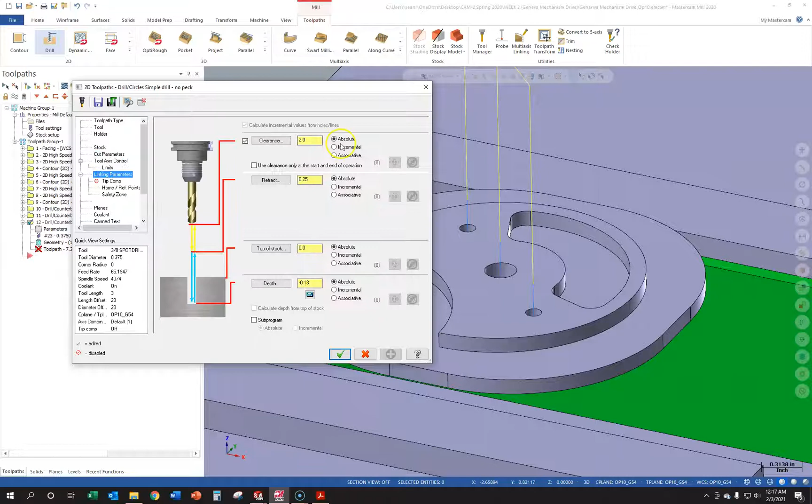Top of stock. So really our top of stock for this hole is a little bit lower because we're at a different level. So we could actually change our top of stock to this level here, so negative 1/8 of an inch at that point. Our depth, as a base, is also going to be -1/8 of an inch. So we want to add that as our baseline.

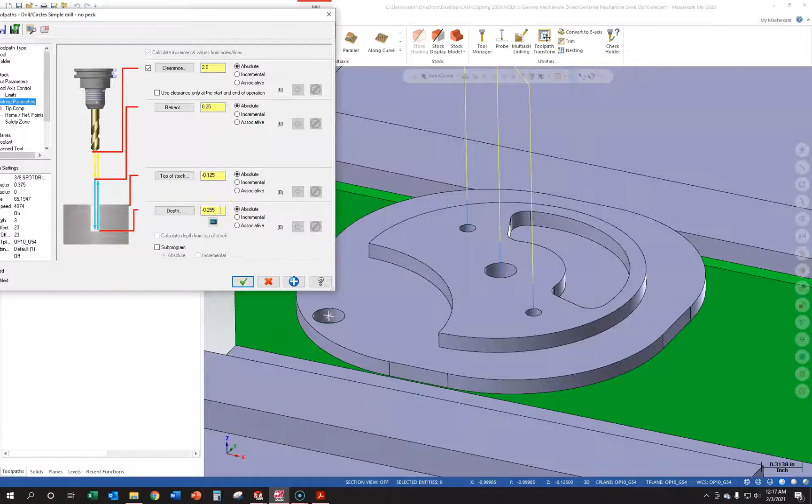And now when we go into the calculator, this is where we use add to depth instead of overwrite. So if we want to use 0.26, we want to add another 1/8 of an inch to the Z position here in order to get to that. So -0.255 is our final absolute depth. So we'll click apply and OK. We'll regenerate that command, and then we'll see what that looks like.

That's too deep, actually. Did something there. I think that's too deep anyways. Maybe not. No, that's correct. Good. So all of our spot drills are complete. I'll save this again. And now we can just quickly walk through the reaming and drilling command, and we can finish off this tutorial. So we're going to go ahead and peck drill these two 1/8" holes to start. We're going to go to drill.

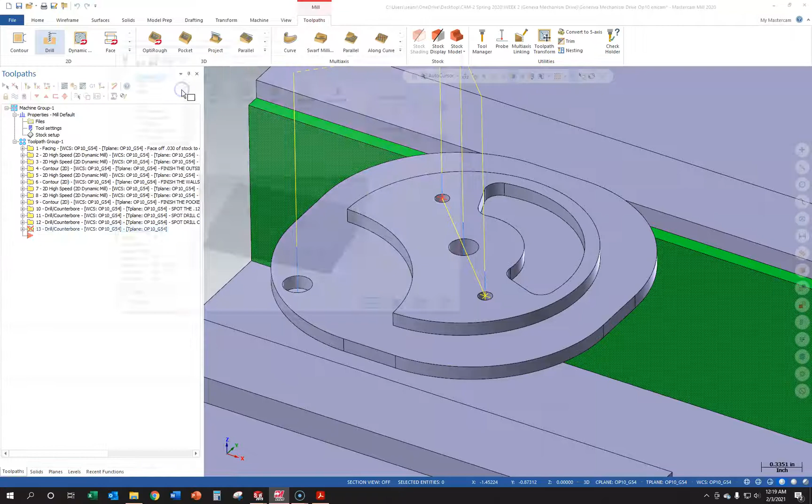I'm just going to reselect these 2 features here. Click OK. We got to go into our tools and find our 1/8" drill. So I'm going to change my filters again. And we want a drill, which is right there, second row. And again, we're looking for 0.125, 1/8" drill. Perfect. Again, I may have to review that and see if we would use a reamer for this. It's close. I would probably use a reamer, but for now, it's getting late, so I want to get this thing wrapped up. So 1/8 of an inch drill.

The comment will be drill the 0.125 holes. We want a peck drill because the size of the drill is small in relation to the depth that we're going. We're going a 1/4 inch, I think. We got an 1/8" drill, so let's peck at 100 thou. So at least we'll get 2 or 3 pecks as we're doing this. Linking parameters should all be good.

Our depth is going to be the bottom of the part, so we'll go ahead and rotate this around and grab the bottom. 1/4 inch. We're not going to add any extra length here. We're going to do that in tip comp. So we'll turn tip comp on. So additional breakthrough of 10 thousandths is good. And then this calculates the tip angle that we need automatically. So that's good as well.

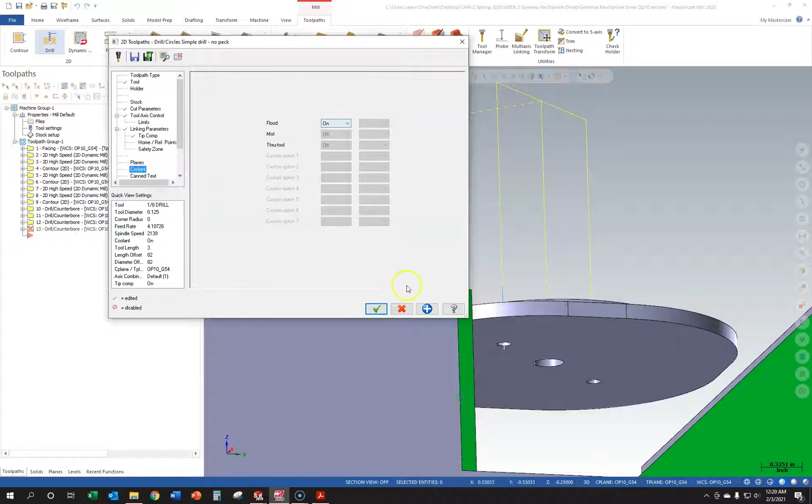Coolant will stay on. Excuse me. So we will click OK. And let's go ahead and just watch that peck drill cycle. I think our top of stock is too high. We should go in there and change that.

It's still a little bit too high. So at this point, maybe we change the retract as well, or not the retract, but the feed plane. We can reduce that. Oh no. No, we'll leave it alone. We're fine there.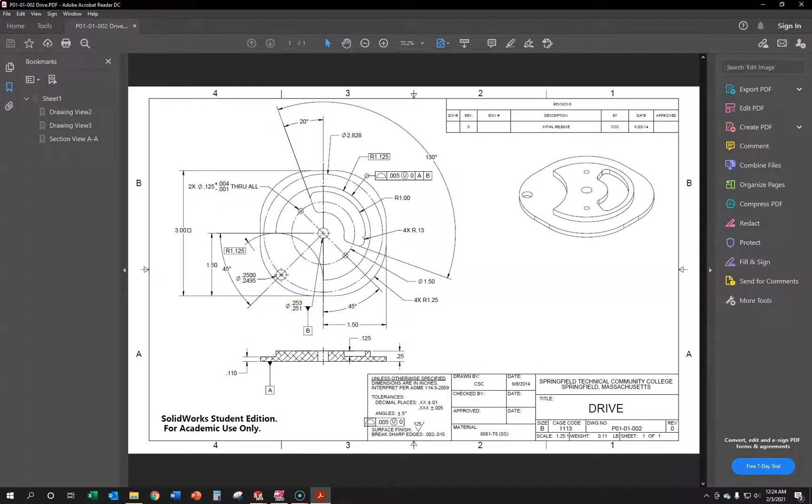Maybe in class we'll talk about those tolerances and we can discuss what maybe we do differently. But for now, let's ream the center hole. We're going to go to cut parameters and see if there's a cycle in here for reaming. Now on the default there isn't, so we'll leave it as drill counterbore for now, but I will add a dwell. So I always forget what the increment is on this. I think it's in seconds.

We want to let the reamer sit in the hole for a little while so it forms. The more rotations you get inside of the hole, the better formed or the more cylindrical it will be. So we want to let it sit there for a little while at depth.

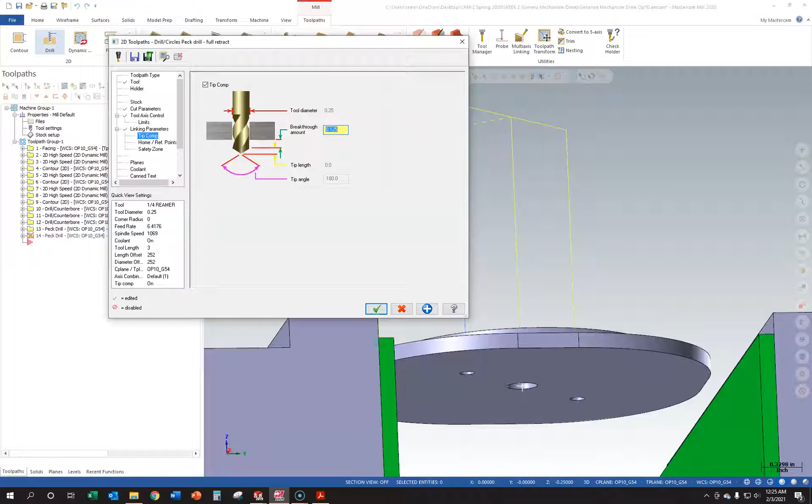Linking parameters. So we're going to again change the depth to the bottom of the hole, but then we're going to go even farther. So we'll have tip comp turned on. The reamer's flat, so it's not calculating a K value, but let's go ahead and put like 0.125 for a breakthrough amount. So we're down past the bottom quite a bit. We may even go farther than that depending on how it looks.

For this we'll turn the coolant off, because a lot of times you actually put oil or something on that for a ream instead of the coolant. So let's backplot this, see what it looks like. I want to make sure we get past the lead on the reamer, so that looks pretty good. And again, we have to review the dwell time on that, but for now we'll leave it at 1.

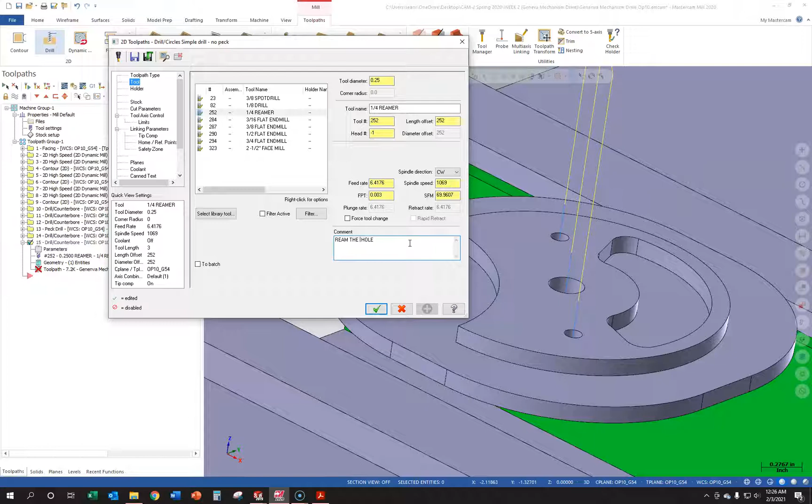And I'm just going to copy paste this and do the same thing for the other hole, just to keep it simple. So we'll copy and paste. And all I'm going to do is change the geometry. So we're going to delete that first one and reselect this hole here. Make sure we get the center. And then we've got to change our depths inside of the parameters and the note as well. So this tool note is going to be ream, we'll call this one the pinhole.

Cut parameters stay the same. So this time we're going to change top of stock, should be 0. So our depth should be, actually the depth is the same, -1/4 inch. It'll start a little bit higher. We could change our top of stock to the top of the hole, bring it in a little bit closer at the start. Tip comp stays on, everything else stays the same.

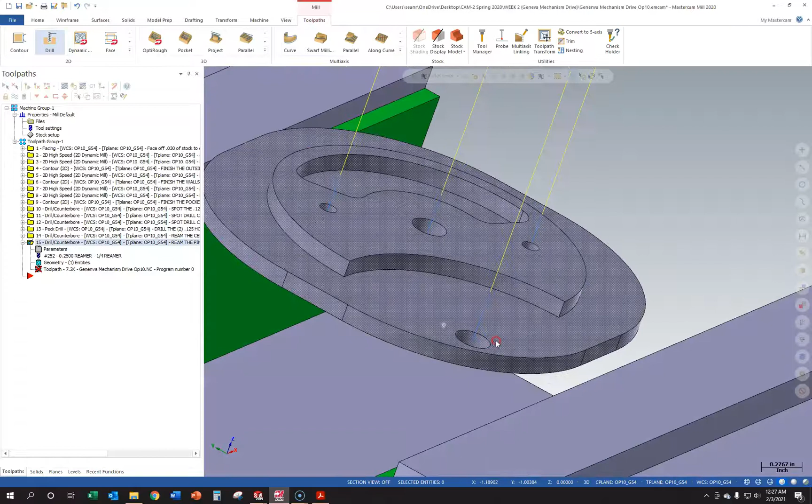And we regenerate, that's right. There we go. So we should have the same breakthrough amount on that, which looks pretty good. So again, we're cutting corners here a little bit, but that looks pretty good.

Okay. The last thing that I want to do for this file, I'm going to save it, is we're going to flip the part over and machine the remaining material off. So to do that, we're going to make a new plane, and I'm also going to go ahead and turn all the fixturing off just so it's out of the way. We're going to make a new toolpath group. So I'm going to highlight machine group 1 by left clicking on it. I'm going to right click, go to groups, and do new toolpath group.

So this is going to be op 20, and I actually failed to rename the first one. So this first toolpath group should be op 10. We should have done that first thing. Good. So I'm going to turn our fixturing and stuff off, and the only thing I'm going to leave on is the part for now, just to make it simple.

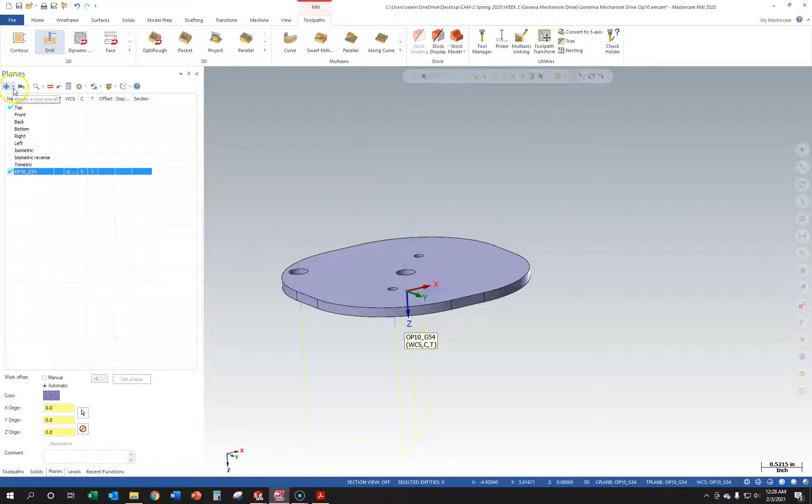So I'm going to flip this over, and I'm going to make a new plane, and we're going to put it in the central hole again here, just like the last side. I'm going to go to planes, create new plane from solid face. I'm going to select the bottom of the part. That orientation looks fine. Z positive is good. Doesn't really matter where X and Y is pointing in this case, because the feature we're going to pick is symmetrical. It's in the center of the part, so X and Y would be the same no matter what we do. So plane 1 of 8 is good.

And the origin point is actually good by default too, because it grabbed the center. We'll probably double check that. I'm just going to click OK. I'll rename this to op20 G55. Oops. op20 G55. And I'm going to use the cursor in the bottom left hand corner just to make sure that I do indeed have the right selection there. And yeah, 0, 0, and the Z origin's a quarter, so that's perfect.

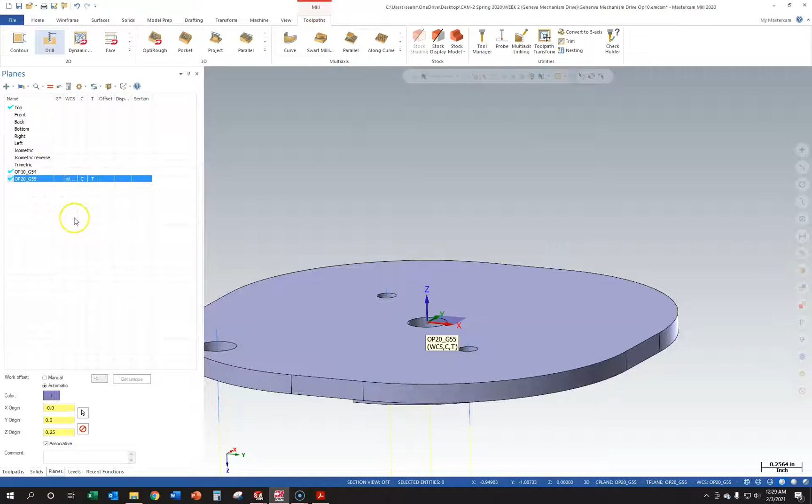I'm going to make the op20 plane. I'm going to make sure that that is selected before we make a toolpath command. And I'm going to go ahead and turn the stock back on at this point because we're going to use that for our facing command. So again, op20, make sure the red insert flag is under op20. I'm going to go to, I'm sorry, not dynamic, facing. I'm going to go to face. I'm going to use the face selection method to pick the bottom of the stock.

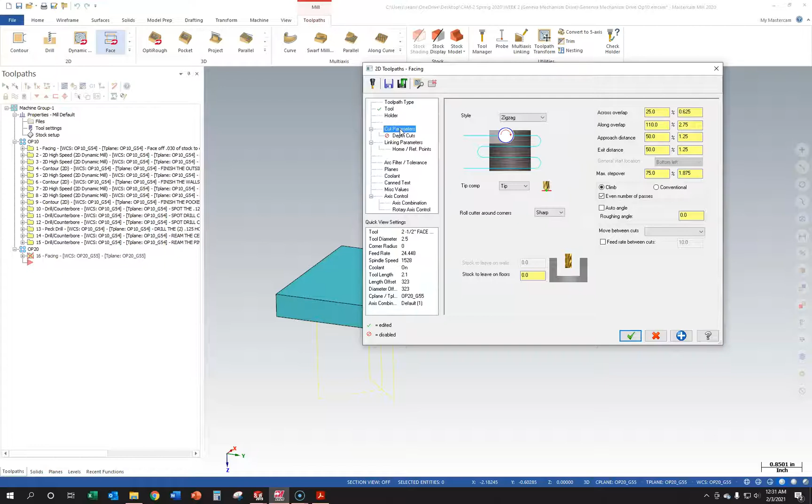I'm going to go in and turn. I'm going to have to go back out after this. I'm going to go into Tool and reselect our 2.5 inch face mill, and the comment for this will be to face the remaining stock off of the bottom. I'm going to reinitialize speeds and feeds. So cut parameters, no stock, leave everything else by default, no depth cuts. Linking parameters, so these should all be good.

Our top of stock is going to be whatever the remainder is, right? So it could be 0.22. We have the math on that, or we just click on it, so that's fine. Our depth should be 0 because we're going to basically the origin point of the plane that we just created. And then coolant should be on. Apply and OK. I'm going to turn our stock off.

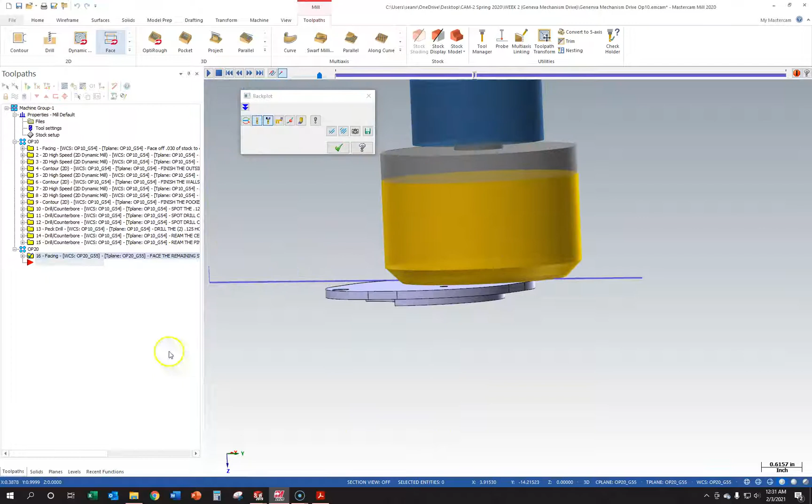It looks like maybe we should probably do a depth cut on this. 1/4 inch is probably rather aggressive. Yeah, there's still plenty of material to remove there. So we will do depth cuts here. So let's do depth cuts max of 100 thousandths. So that probably means we're going with 3 passes. So there's number 1. There's number 2. Yeah, 3 and 4. Perfect.

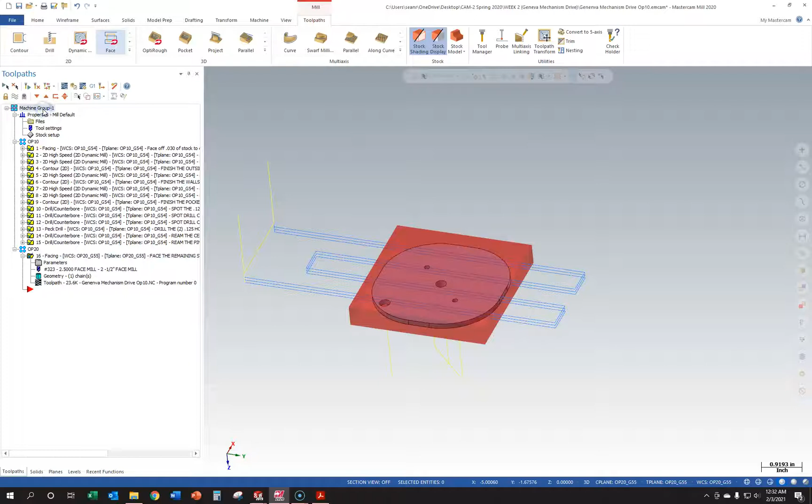Okay. Now again, because we're only facing the bottom, it's not worth doing a new fixturing setup and all that stuff for this. So I'm happy with this. I am going to go ahead and select the entire machine group, and let's do a verify and just simulate the entire part. I'm going to put the insert flag up top here and make the first plane. Let's turn all this stuff back on. I'm going to make the op10 G54 plane active.

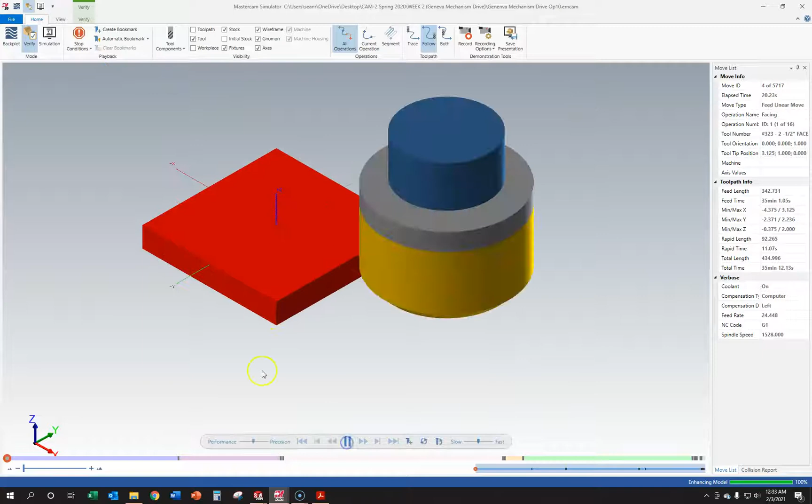We'll look at it this way. And I'll turn the stock model off. And then I'll save it. And then we can do the verify real quick and see what that looks like. So we make sure all of these are selected. Verify. And now we'll let it run and see what it looks like. So far I'm happy with it. Looks good. Good, great. So there's our finished part.

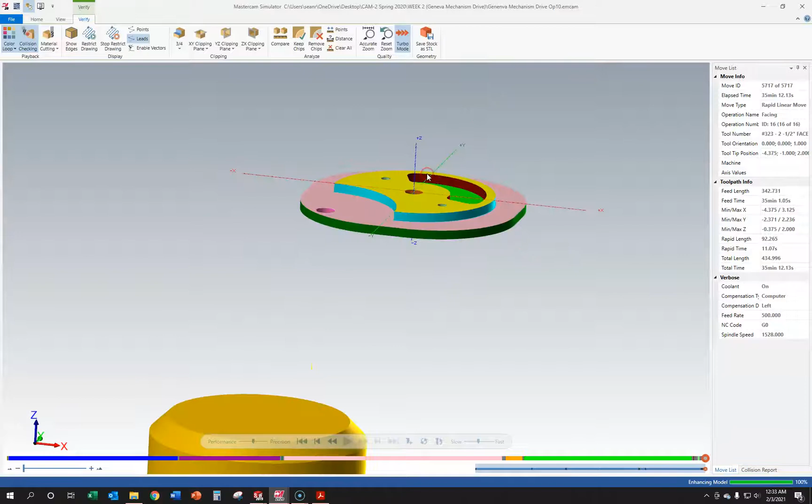So at this point we could use the simulate, verify the comparator and check for tolerancing and things like that. Probably go over that in class next time. But for now, this is the end of this. So once you get to this point, if your part looks just like we just reviewed, you're all set.